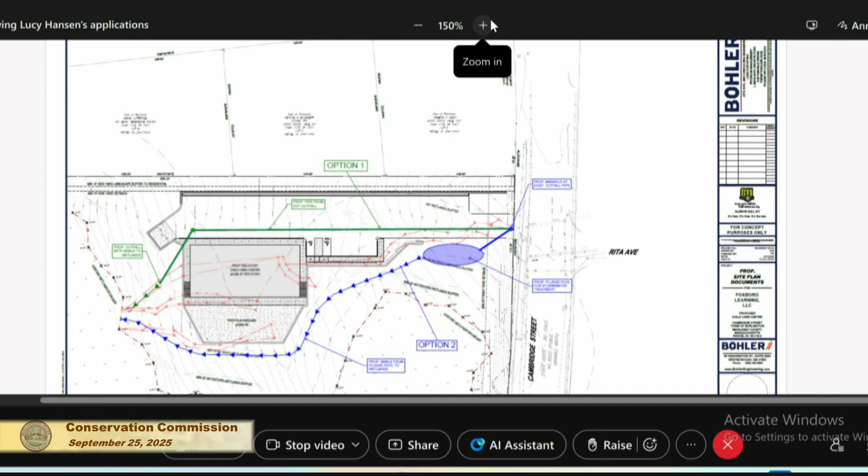Foxboro Learning is looking at developing a new learning center at Zero Cambridge. In the process of originally surveying and developing this property, it was discovered that there are jurisdictional streams running down the property. This is one of the concept drawings currently being worked on, we'll get to the blues and reds in a minute. What we would like to do is have an informal discussion about how the Conservation Commission would like us to address the disturbance to the resource area, which is the jurisdictional streams.

Where the green and the blue intersect right off of Cambridge Street is a stormwater outlet, and from that outlet it has created cut-throughs and different surface drainage and channelization of surface flow over this area, feeding the wetland complex to the west. One of the things we want to discuss with the board is we had a couple ideas on how you would like us to proceed.

One of our original ideas was that we were going to connect the outflow, the road outflow, to a different pipe, have it drain into this plunge pool, which is in blue, and then have a swale go around the property. We had two options: one, we were going to have a swale that drains.

We were going to have a swale, so this is the plunge pool. Actually, the glare from that is hard. It's actually easier over here.

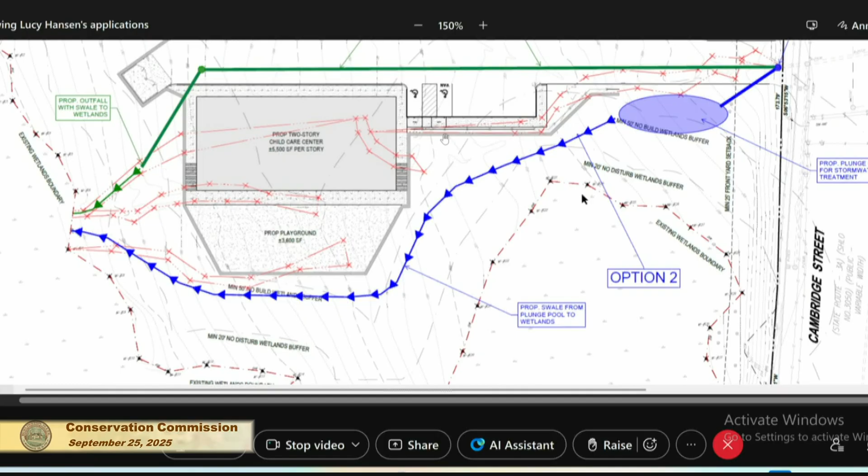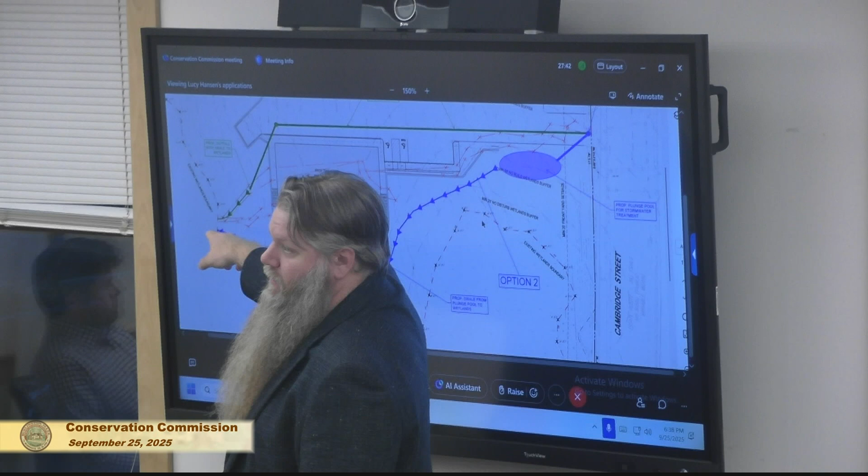This is where you can see the storm drain collects water and dumps it out here. One of our original ideas is that we create a plunge pool that collects water here, then create at least one or two swales, one draining into this wetland, the top of the wetland complex, and another swale that takes it around the property, daylighting the entire time, and drains into this wetland complex. The idea is that both wetland complexes are still receiving water that it would normally receive from the stormwater drain.

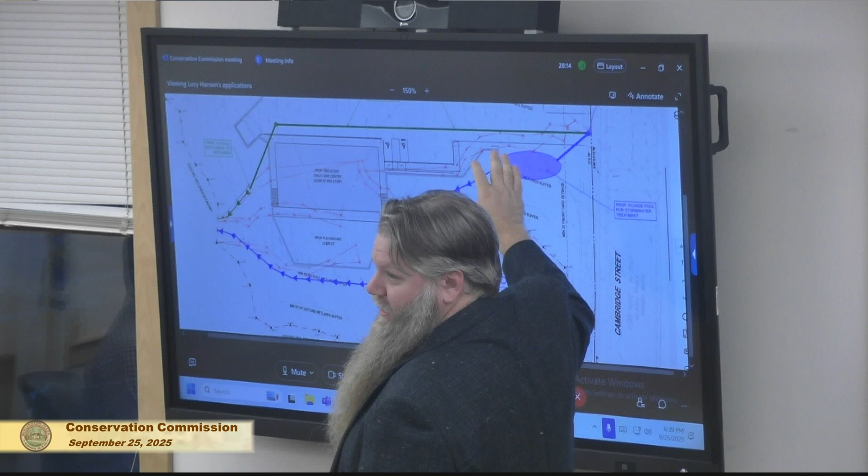We've only got one here, so we can just do the one. One of the concerns is that splitting the flow that originally all went down here, so we only have the one blue swale that collects it from the plunge pool. The idea of the plunge pool is it's going to be a settling pond, because we all know what stormwater coming off the streets is going to be like—it's not great. So the idea is to settle and collect a lot of that suspended load, and then have much cleaner water come through into the wetland.

That was option two. Option one is this green line. This entire area, green, where is it? This guy right here.

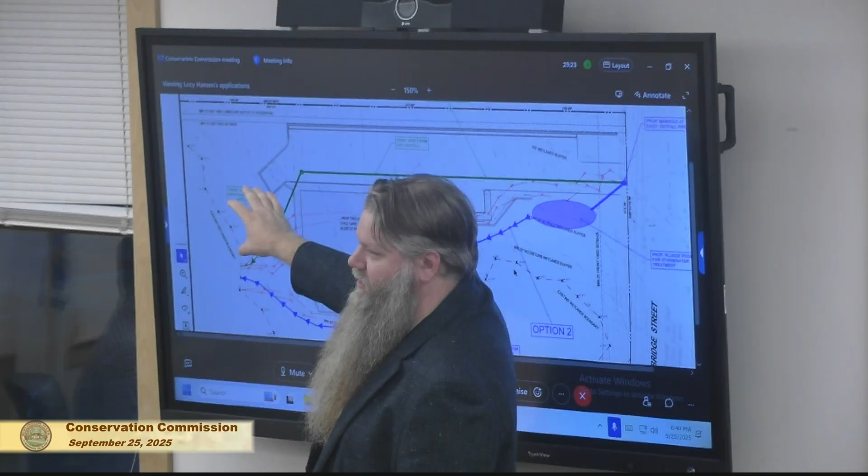Because you've all been out there when we walked in to look at the encroachment that happened during initial geotech drilling, you know that it's slanted. So there's going to be a good deal of fill that brings this up to grade to the road. One of the other propositions is that we connect it straight through with a stormwater pipe. It collects water here, sends it straight through, and we have an outfall at this retaining wall that dumps it right back into the wetlands. Really the only change is that instead of having this braided superficial flow that channelizes over time, it takes it and sends it directly to the wetland, and that way the water is still getting there.

So that's what we want to talk to you about—whether you'd prefer us to pursue this, because this is a very simple concept showing these two plans. Before we dove into it further and spent more time developing these two plans, we wanted to get an idea of which one you are more inclined for us to pursue: the plunge pool and daylight swale on the outside, or the direct link underneath that spits out at the bottom of the property.

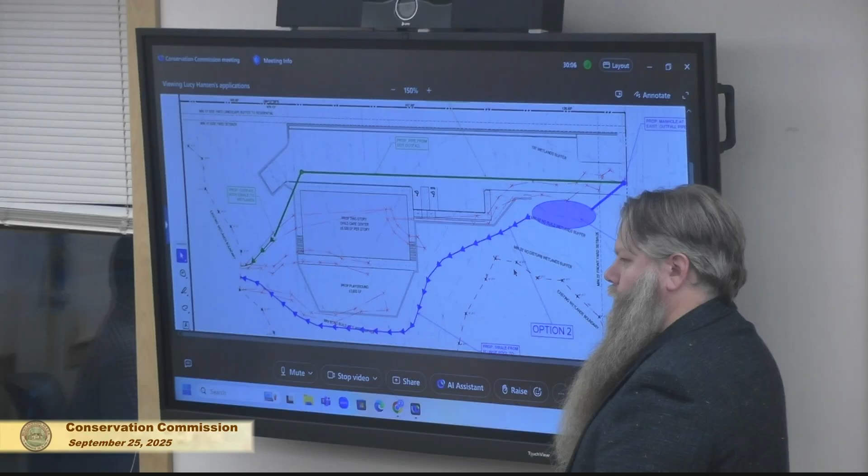Before I ask Eileen for comments, is the current stream shown in this drawing? This red line right here is where the current delineated stream banks are.

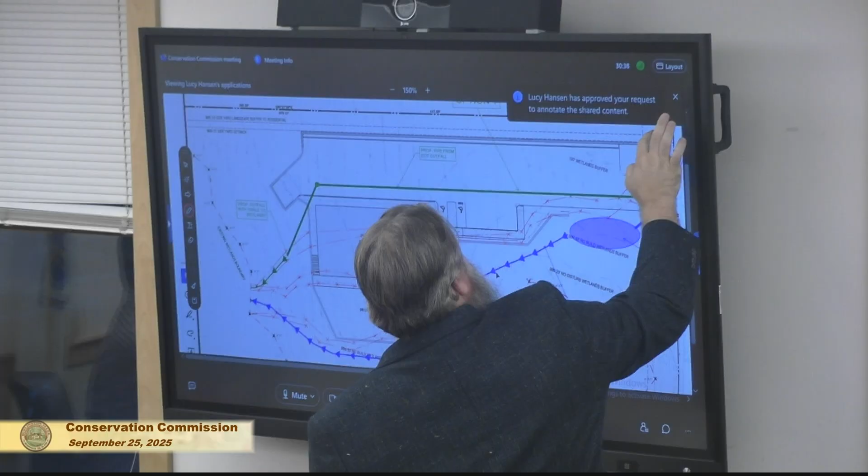Oh, does it not? Can I... this is the stream banks going right through. Wait, you can send the request. Let me see if I can grant it. Approved—so can he draw on it now? Is it approved for what? To annotate, draw. We'll see. You can scribble on it. Oh wait, I have to click it. Scribble on it now. Yeah, click it. All right, there it is. So we'll do this in blue.

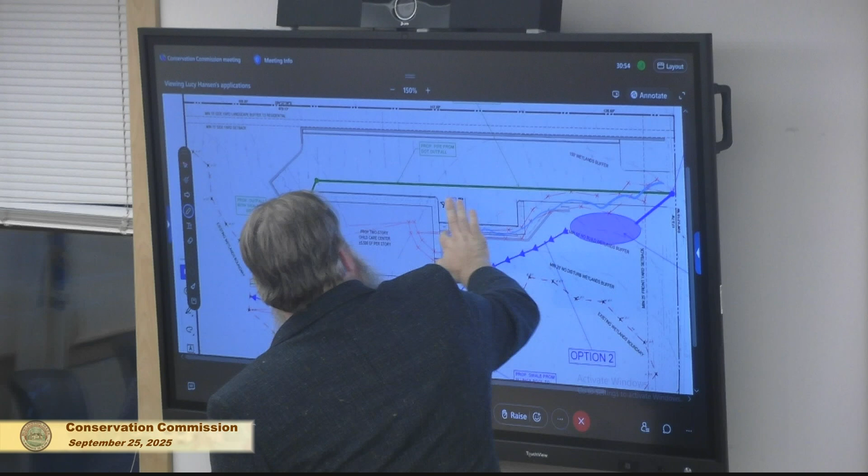I think you're the first person to ever do this. This is awesome. This is the original, and this is the delineated streams right here.

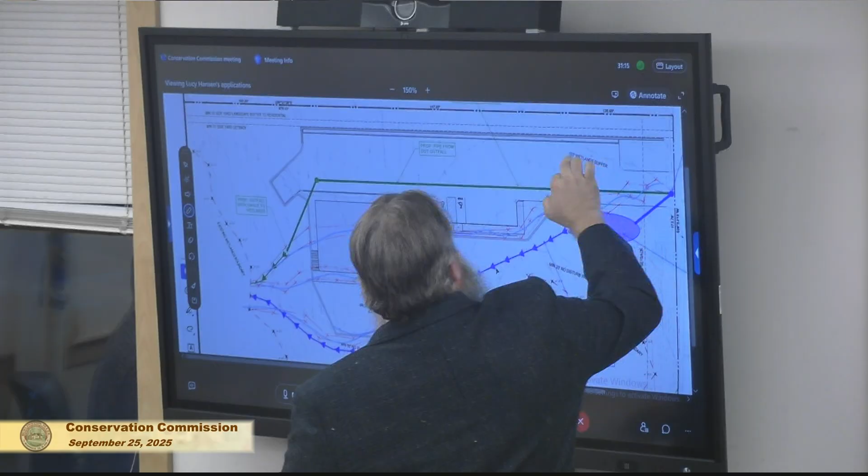So the idea is these are just braided superficial streams. They've channelized over time because it's stormwater coming off of Cambridge Street. Braided means like when you look at glaciers, because it's real shallow, superficial flow, it creates this braiding effect where the microtopography sends different rivulets of streams, and over time it has created more channelization in some of the braids.

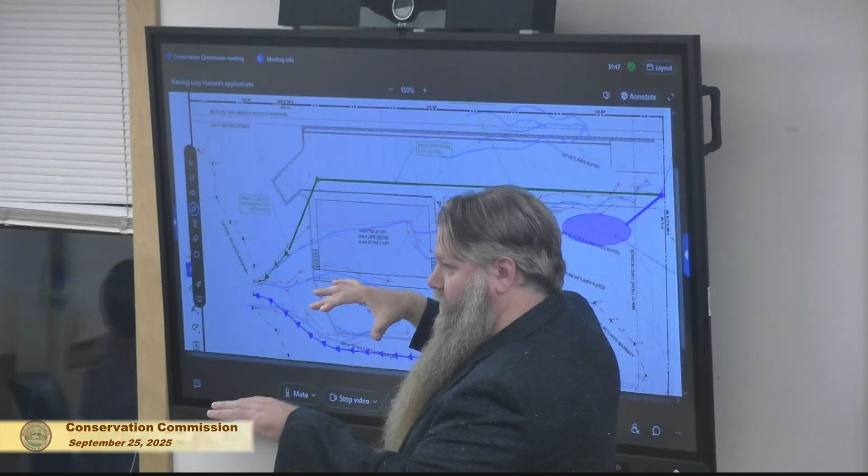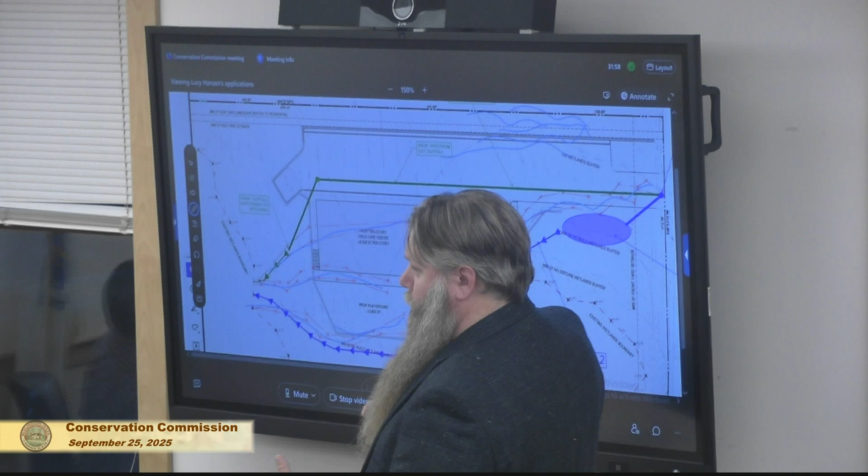That's what we delineated for the original stream bank, some of those braids that have channelized more, and that's where we get the jurisdictional streams. So one of the two options we're proposing is, since these channels were created from the storm flow coming in, we want to capture all that storm flow and make sure it passes all the way through the new structure we're developing and puts it right back in the wetland, so the wetland isn't losing any water.

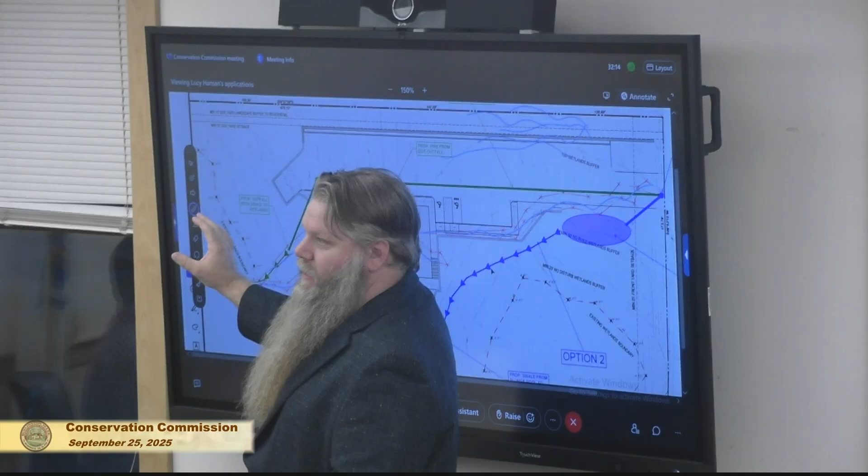Okay, so let's, you can have a seat, or stand there, whatever you want. I have a question. I was going to go to Eileen first. Eileen, do you have comments? Then I'll go to Sarah next.

Just to remind you all, they did do an ANRAD back in 2018. That's how we identified the fact that those are officially streams under our bylaw definition. But as Jeremy said, they're definitely movable, because when we found that enforcement, what turned into an enforcement this summer, there had definitely been some movement from what was there before. So that's part of why I think it's possible that they can move those streams. They are kind of a movable feast as it is.

I personally like the blue option better, because I don't like the idea of just sending it into a pipe and then straight through to the wetland. This way, you're feeding the existing wetland that's there, and you're sending some through as well. It just seems like a more natural option to me, but it is definitely just pretty dirty stormwater that's getting there in the first place.

One of the reasons why we wanted to give this option as well is because with this option, we are building this swale in the 50-foot no build. So Nick and his team worked to redesign the building to get it out of there.

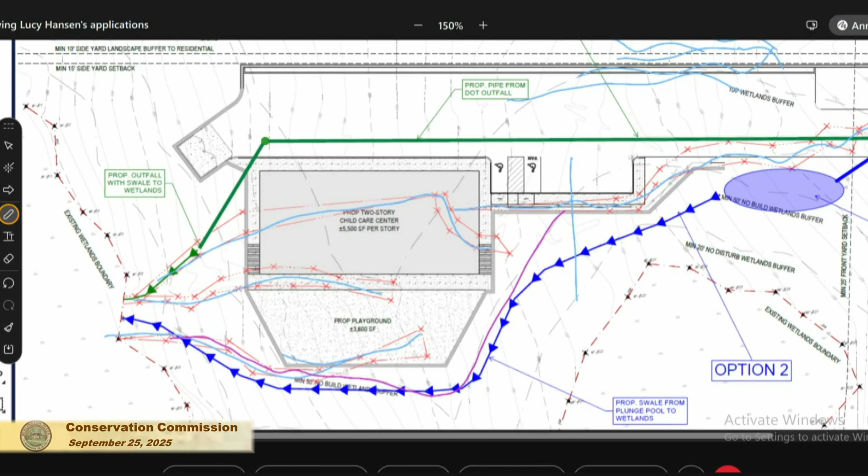The somewhat tricky part about formally sizing that plunge pool will be understanding the flows that outfall experiences today. Since it's a DOT pipe serving the DOT Cambridge Street drainage system, we'd have to understand how much area that's picking up, so we could calculate how much runoff we'd expect that pipe to experience in, say, a 25 to 100-year storm.

But we would certainly take that into consideration. Really, I think your plunge pool would then just have an overflow relief point that would discharge into that swale, and it would just carry it along back towards that wetland resource area.

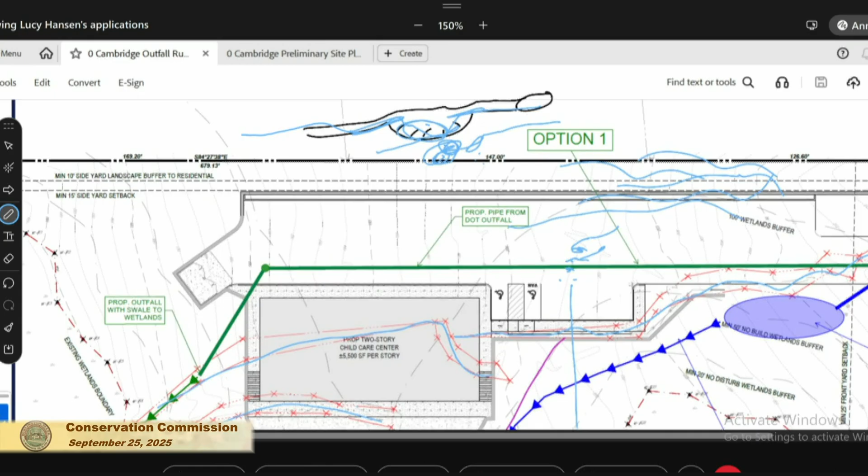It's like an equalization basin. A little bit, yeah. And the reality is too, if there's a storm event—one of these kind of crazy storm events we're seeing pretty regularly these days—

like 8 inches over the last 24 hours, or over a 100-year storm, whatever it is, it might not provide the level of treatment it's designed for from a TSS standpoint. The water would just hit the plunge pool and then go into that swale. It would essentially do what it does today, without that level of treatment, but there wouldn't be any concerns, since the water would just go down that swale.

We'll also size the swale accordingly to make sure it's wide enough and the slope isn't going to be an issue, so water will rip down that swale as it does in those streams today. This swale is essentially replicating those streams today, but they'll be more defined and grassed, so even just the grassed manner of them will provide an additional level of treatment to that water that doesn't exist in those streams today.

I think currently there's about a 40-foot difference in topography from the stream to the wetland. You wouldn't anticipate like a riprap or a check dam.

We could certainly do check dams throughout the swale, but is your concern that the swale slope would be too steep? It's a little hard to speculate on now. I think some of the swales are more sort of temporary retention, maybe to possibly slow the flow in the event of something.

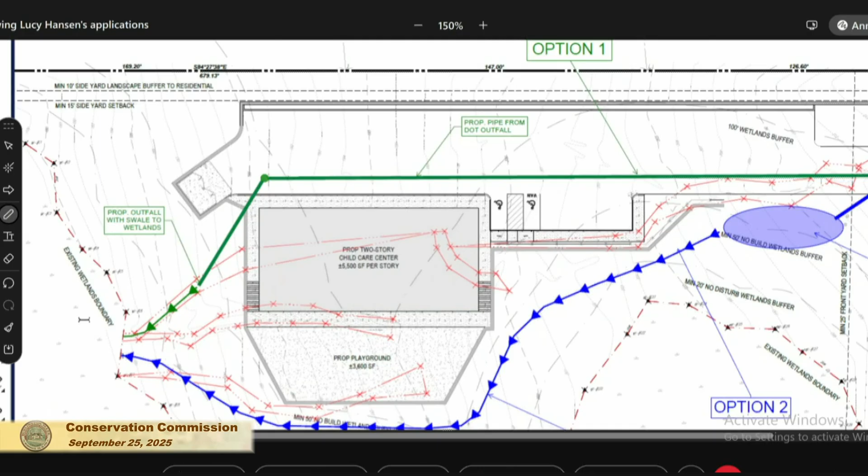If anything you're doing is changing the nature of that overland flow to the wetland on the right, you may want to direct some water to go into that wetland to compensate for that change. I don't know how you're changing contours and filling and all that.

Absolutely, as we get into the design we'll do kind of a watershed analysis and see what's going where, which part of the wetlands is being fed by what, and then match those areas to the maximum extent we can.

And the last thing I have is if any of the wetlands, like that one on the right, seems unhealthy because it's not getting sufficient water, you may want to make a case for delivering some of the water into it to help it along. I don't know if that's the case, but that wouldn't be naturally occurring. But if you think all your development is going to change the natural flow into it, you may want to do that, especially if it's not looking so good.

Yeah, Jeremy, correct me if you think differently. I don't think it's going to be too big of a lift to come up with a design that matches the existing condition today, in the sense that we're sending similar flows to these different areas of the wetland. I don't think that's going to be too challenging, but we'll have to really explore that in more detail once we put our pencils to it.

Well, we're kind of out of time now. Is there anyone who wants to make a last comment? Option one automatically goes into your alternatives analysis. Right, we did discuss it briefly. So do you have enough to go forward with? Absolutely, what we're thinking. I think this was extremely helpful. Okay, alright, thank you very much. We appreciate you coming. Good night. I keep getting bumped out here, this is the fifth time I've had to log in.

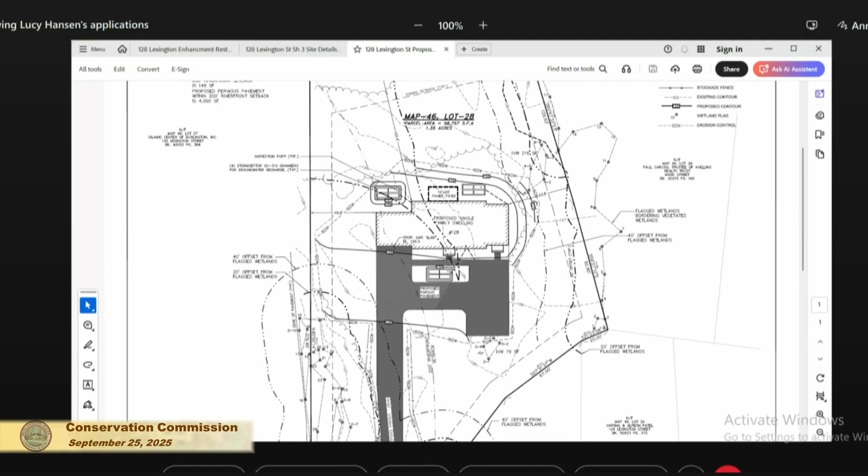But they're going to have to do a bit of grading over the chambers, so that's accounted for in the plans that came in today. They're doing a bit more, they're going to have to raise the soil above the chambers. That includes the one in front that Bill was asking about last week, so they'll probably have to make that into some kind of feature because it's now going to be about a foot over the level of the driveway. It'll be a one-mounded feature of some sort; they're just going to have to make it pretty.

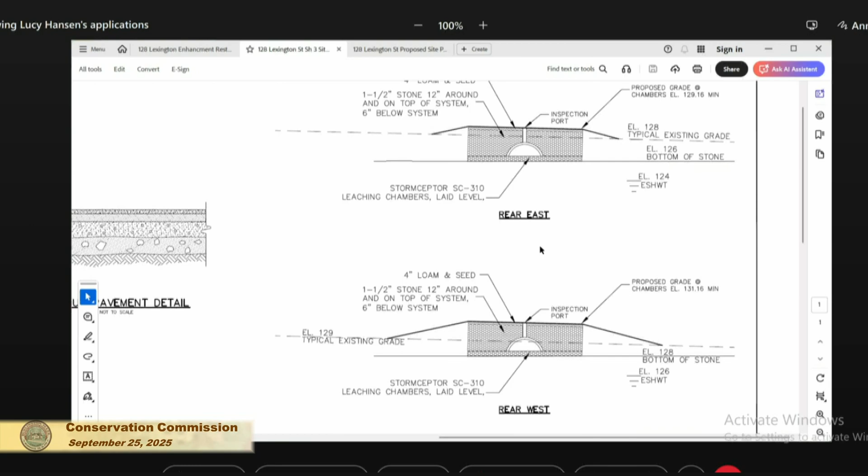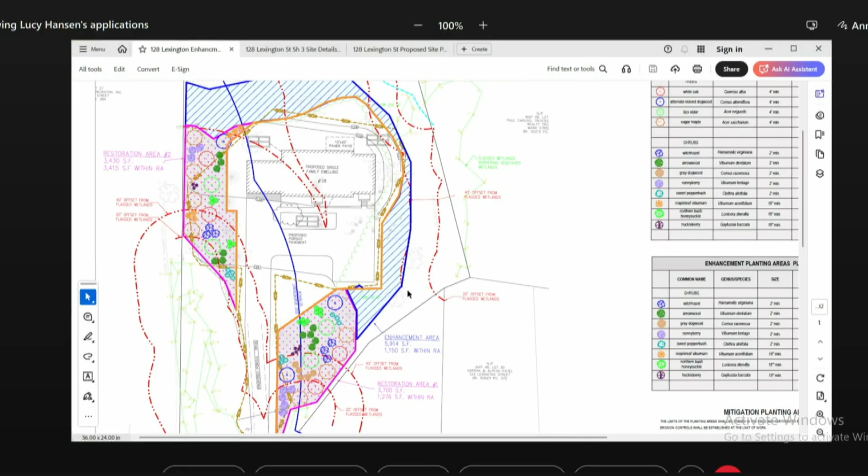They had tweaked the detail of this, provided the detail of the porous pavement, as Rich said. There's two things I'm still a little concerned about. One is there's a lot of planting happening, but still not that many trees, though they did double the amount of trees. The other thing, and honestly there's not much they can do about this, is they found the isolated wetland, an IVW with vernal pool features, practically right up against where the driveway is.

Having said that, they have to get into their site. I'm not sure what else they could possibly do about that. I just wanted to point out that those vernal pool features haven't disappeared, and the wetland is very close to the driveway. But I did add something into the conditions in the decision, which we can discuss as we go along. So how close, is it an actual vernal pool? Well, it's got vernal pool features, it exhibits vernal pool characteristics in that it appears to hold standing water. The driveway that goes into the site now, we're just building the porous pavement driveway within the footprint of that existing driveway, but we're also including a lot of vegetation within that vernal pool buffer zone.

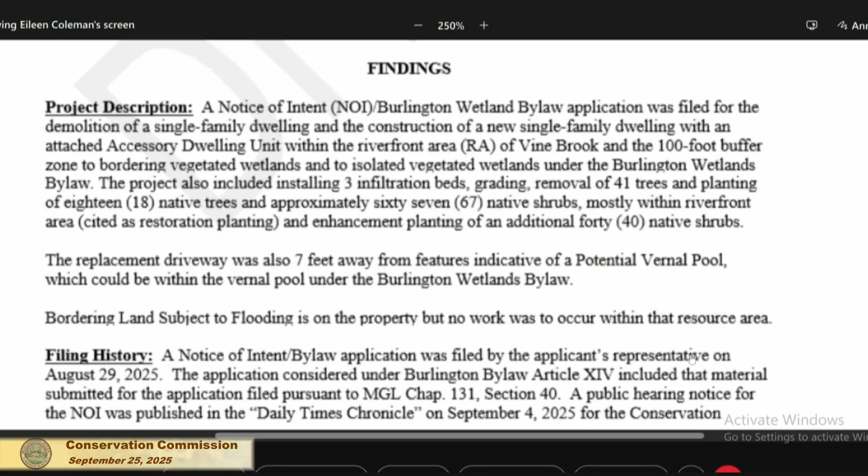Excuse me, Eileen, let me interrupt you for a second. I have 2 paper copies. Would it be easier for you to have this? Sure, why don't you use this, since I've already looked at it. I appreciate that, it'll be a little easier to review. Got glasses on too. He doesn't have his glasses. Well, I'm good, it's big enough. They're not the same document, one is the findings, the other is the conditions. Oh okay, so we're on the bylaw right now, we're on the findings right now.

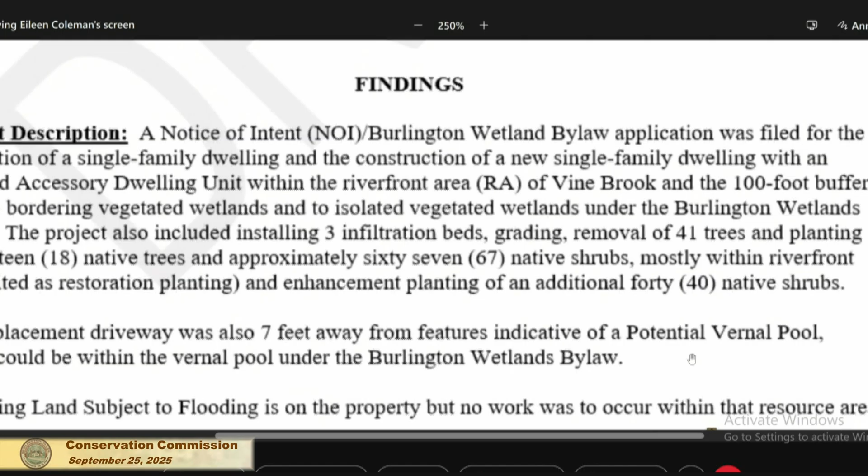Approximately 67 native shrubs, mostly within the riverfront area, cited as restoration planting, and enhancement planting of an additional 40 native shrubs. The replacement driveway was also 7 feet away from features indicative of a potential vernal pool, which could be within the vernal pool under the Burlington Wetlands bylaw.

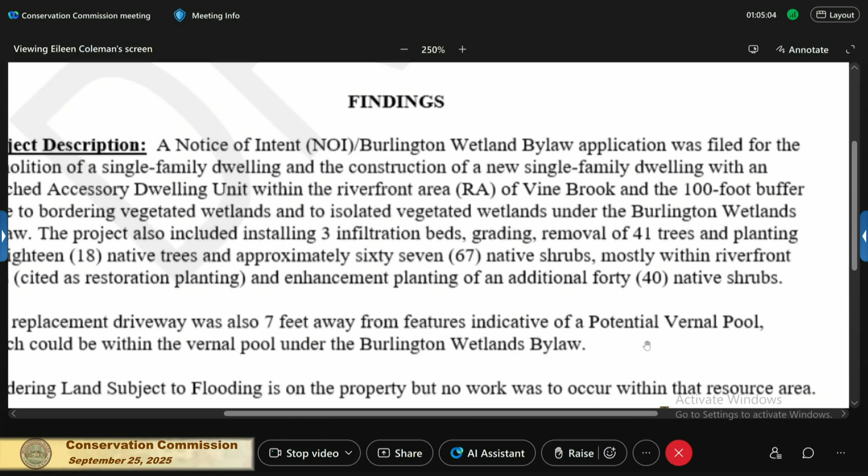Bordering land subject to flooding is on the property, but no work was to occur within that resource area. We went through the filing history with some dates and listed all the various plans and documents which were sent in, including ones sent in and updated as we went along.

As we said, the proposed work was partly within the 200-foot riverfront area, the outer 100 feet only, within the 100-foot buffer to BVW and IVW, and within a potential vernal pool, BLSF. We're repeating a lot of the same things here.

One thing that's slightly different is I think I put the wrong number in there, so I've changed it now. At their closest points, the proposed new dwelling was approximately 165 feet from the bank of Vine Brook and approximately 51 feet from BVW. I had said 46, but that was the edge of the property, so it's actually a little further, unless I got that wrong, which Rich will correct.

The closest point of the proposed porous driveway was about 20 feet from BVW, which I might have measured wrong, and 7 feet from IVW, which also coincided with potential vernal pool features. Tree removals occurred across the lot as close as approximately 130 feet from Vine Brook and within the buffer to wetlands.

An estimated 2,738 square feet of degraded area within the riverfront were created by this project. This represents less than 5% of the total lot size of almost 59,000 square feet. Within the RA, the applicant proposed almost 4,700 square feet of restoration, lawn to naturally vegetated land, and over 1,100 square feet of enhancement, adding native woody vegetation.

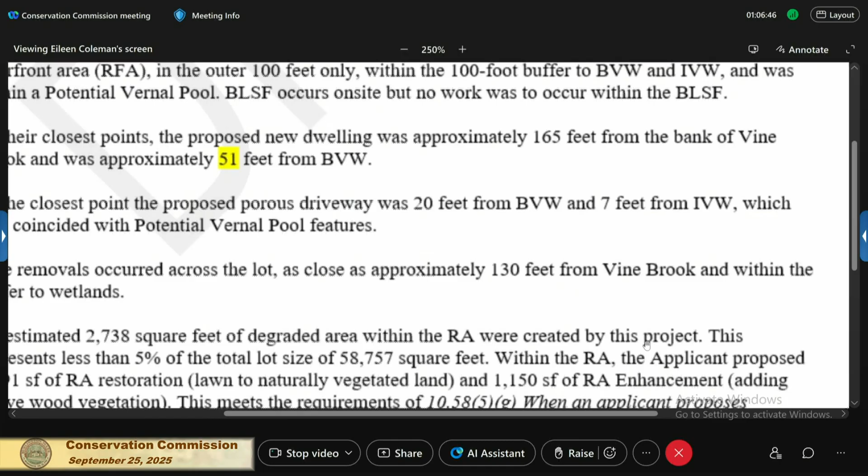This meets the requirement of 10.58(5)(g). I won't read that whole thing unless you want me to, but it's about providing at least 2-to-1 of mitigation area to area of alteration, not conforming to the criteria, etc.

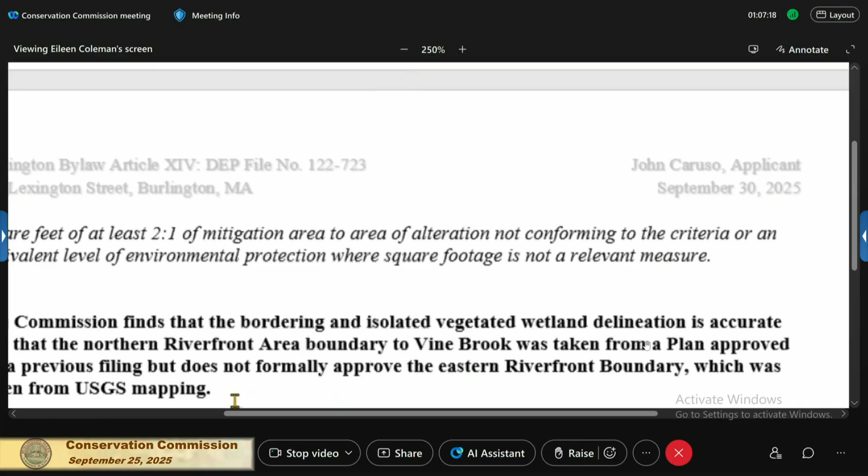The Commission is finding that the bordering vegetated and isolated vegetated wetland delineations are accurate. The northern riverfront area boundary to Vine Brook was taken from a plan approved from a previous filing, but the Commission does not formally approve the eastern riverfront boundary, which was taken from USGS mapping. That's not a big deal, it was just a small feature of the lot.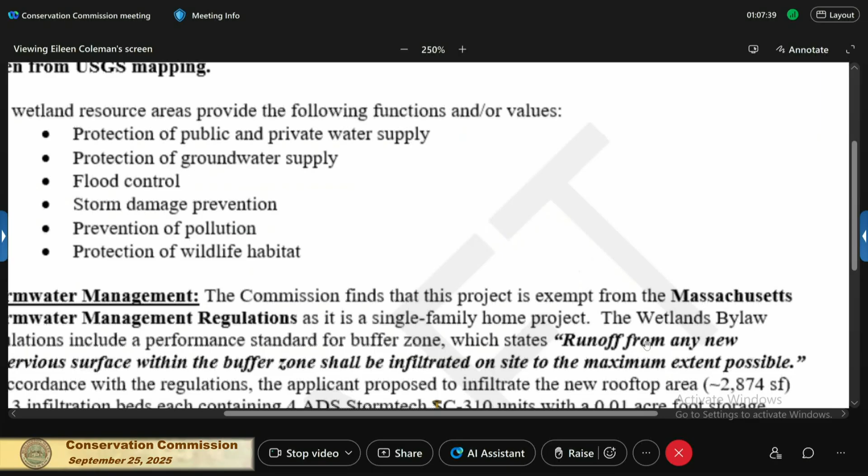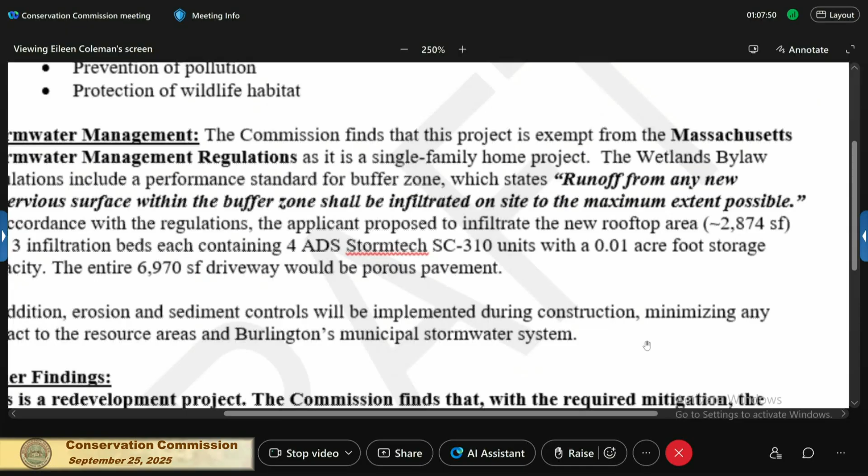The Commission is finding that this project is exempt from the standards as it is a single-family home. However, they are infiltrating to the maximum extent practicable, consistent with the bylaw. They propose to infiltrate the new rooftop area into 3 infiltration beds, each containing 4 ADS StormTech units with a 0.01 acre-foot storage capacity, and the entire driveway would be porous pavement. Erosion controls would also be implemented during construction.

Other findings: this is a redevelopment project meeting performance standards found in 310 CMR 10.58(5)(d) and (g), and additionally the Commission finds that given the site constraints, there is no feasible alternative. The highlighted ones are the ones we're going to have to vote on, or just things to be aware of. The Commission is going to vote to waive the 20-foot no disturb setback.

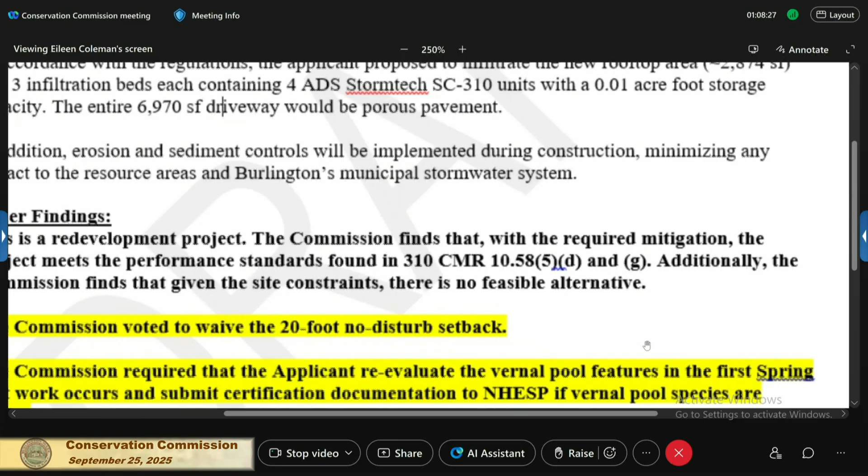The Commission is also requiring that the applicant reevaluate the vernal pool features in the first spring that work occurs, and submit a certification document to NHESP if vernal pool species are found, to take a look at that, if they're okay with that.

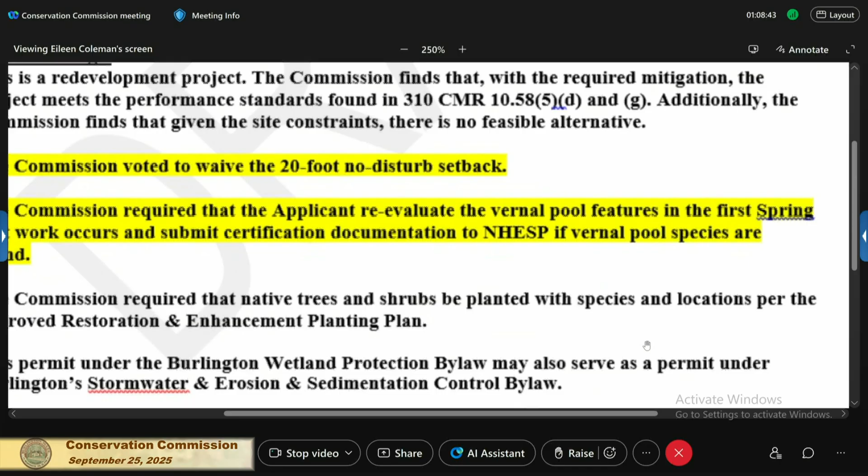The Commission is requiring that native trees and shrubs be replanted with species and locations per the approved restoration and enhancement planting plan. The permit will also serve as a permit under the Burlington Stormwater Erosion and Sedimentation Control Bylaw.

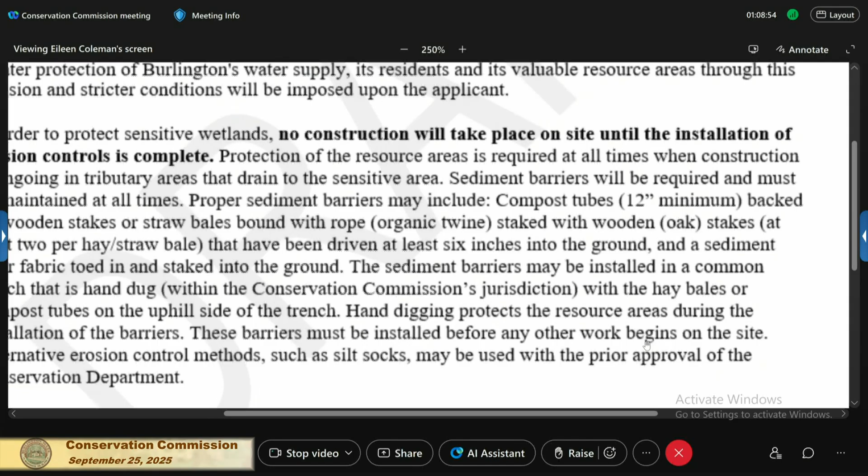All standard stuff for the next half a page. They're going to use either compost tubes or hay bales for erosion controls. Don't use pesticides, herbicides, or fertilizers on site. And just towards the very end, we're suggesting a bond in the amount of $3,500, which is pretty standard for a single-family house with fairly substantial work occurring.

Now we're just going to open up the order. So you're going to give them that, and you get it back when you're all done. Am I speaking too fast?

All right, is this small? There's a typo there in stormwater management, the driveway, the spelling. She fixed it already? Oh, she got it, DIVE. Yeah, thank you, I caught the DIVE.

Okay, again listing the same plan set, we've switched over to the order now. And then for conditions starting at 22, most of those first few are just the completely standard ones that we have every single time about how it's going to comply with the project as described in the documents that we approved.

It's permitting work in the 200-foot riverfront area and the buffer to wetlands and within potential vernal pool, bylaw jurisdiction only. No other work within other wetland resource areas has been permitted.

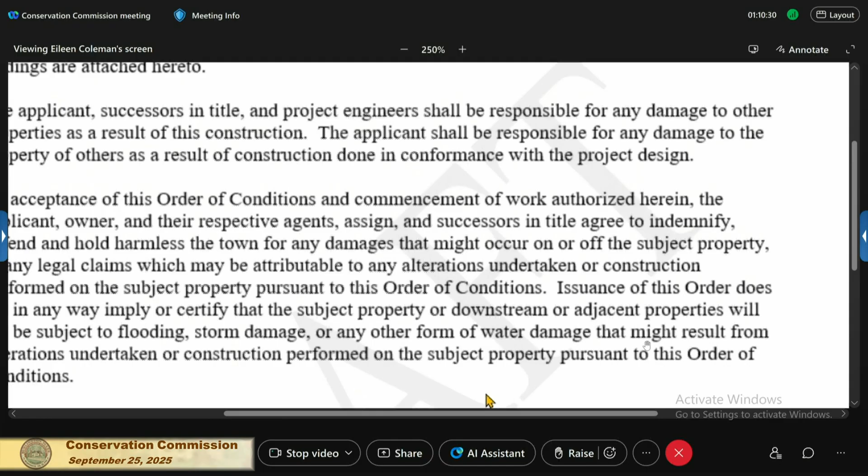Again, standard ones saying that by acceptance, you agree to indemnify and defend. This standard wording comes in all of them. Pre-construction conditions say that you have to be in touch with us a few days before the project begins.

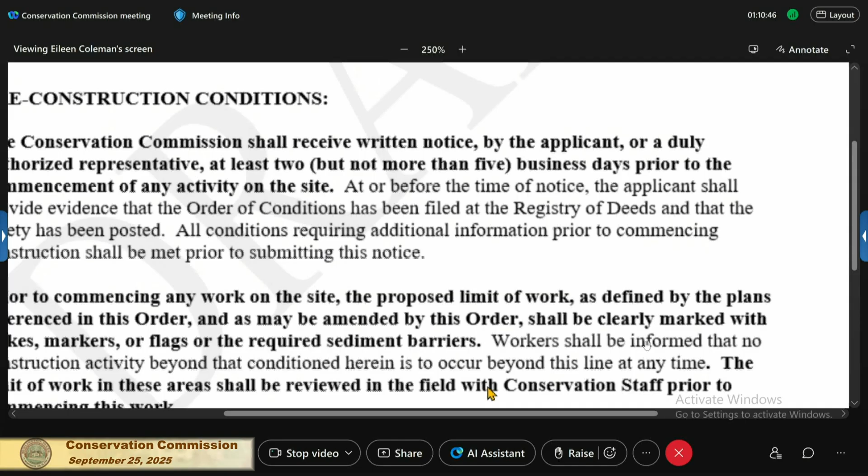Sorry, what number are you on? I'm now on 28. Oh, for some reason we're all kind of sideways on this. Yeah, Lucy, if we could just- Apologize, I swear to God. Sorry about that.

Those first earlier ones are kind of standard. So now we're getting onto ones where we have a little bit more tweaking.

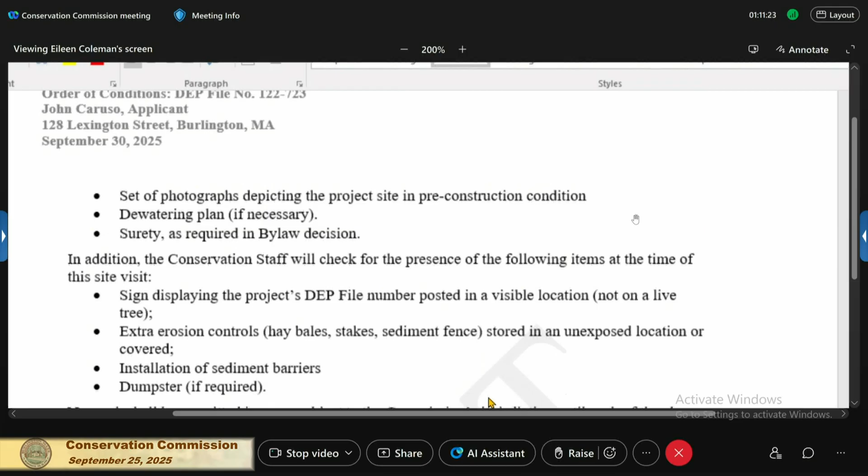All of the pre-construction ones are really talking about how you have to get your erosion controls on site, stake out limits of work, give us a call to have an inspection, at which time we're going to check all those things. You're going to give us a list of who's going to be working on the site. Your DEP sign has to be in place at that time, and your surety will need to be paid. Erosion controls all have to be in place.

Swinging down to erosion controls, the sediment barriers shown on the reference plan are 12-inch compost tubes, I believe. We are okay with that. We frequently like to have straw bales in riverfront areas, but most of the work is in more outer riverfront, so I'm okay with them using the 12-inch compost tubes as shown on their plans. I love a compost tube, if somebody can say that.

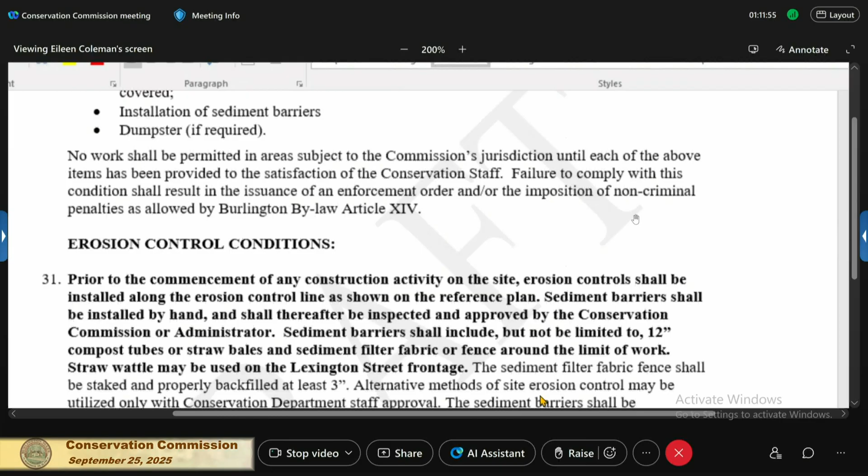Straw wattle may be used on the Lexington Street frontage. A construction entrance, which is on their plans, shall be installed at the location marked in the reference plans. Materials shall not be stockpiled on the site within 40 feet of the stream or wetlands, or at a location that will allow materials to run into the streets. There's a bit of a slope down into the site, so I don't think that's going to happen.

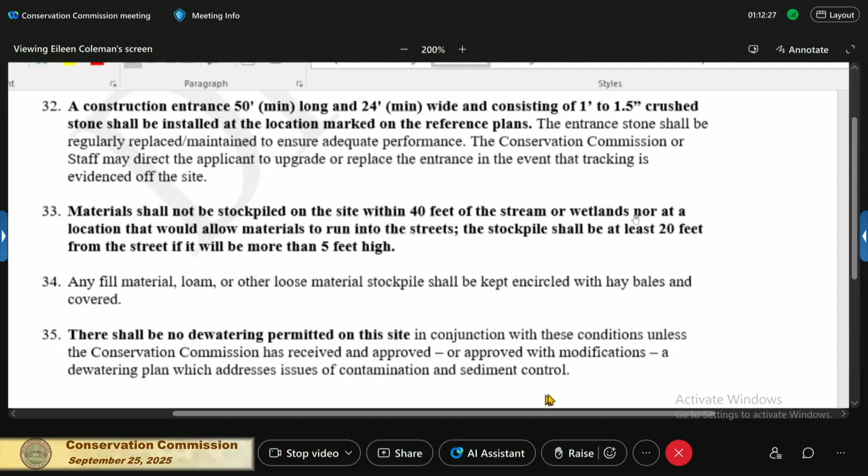Keep stockpiles on site in good order, circled with hay bales and covered if they're going to be there for a long time. No dewatering permitted on this site unless you give us a plan first so that we agree on how you're going to deal with that.

Keep the streets clean, put a silt sack in catch basins within 100 feet of the property. There is one at least right outside it between you and the Islamic Center, I believe. And we reserve the right to require additional erosion control.

For work involving filling and grading, it just says no additional grading beyond what's shown on the plan unless you come back to us first.

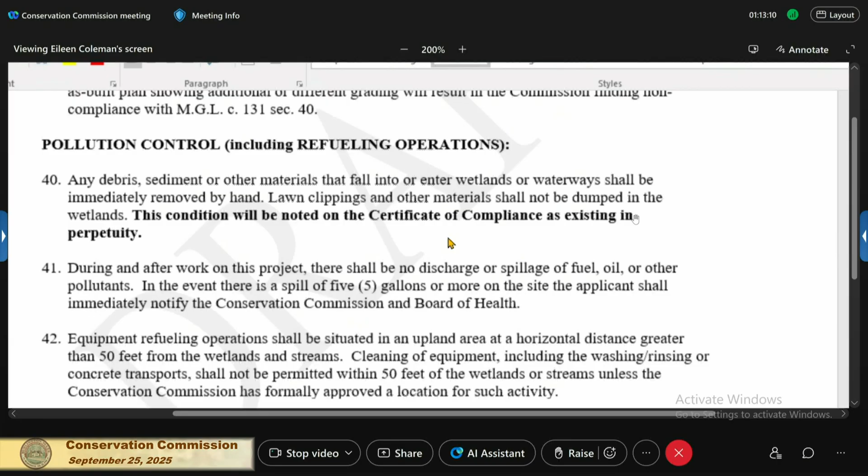Under pollution control, those are all the standard conditions about keeping the site clean, no discharge of fuel on site, and if there's any visible or smellable discharge, you need to inform the appropriate people. No pesticides, herbicides, or fungicides to be used on site within 100 feet of wetlands. Fertilizer may be used if it's slow release, phosphorus free, and approved in advance by the Commission.

Under the stormwater management plan, we're describing how it's going into 3 infiltration beds. The driveway shall be porous pavement. Applicant shall provide photographs of the stormwater management system being installed, and shall maintain the stormwater management system and porous pavement in good working order. The drainage system shall be inspected and maintained by the homeowner, and porous pavers shall not be seal coated or replaced with impervious material. This condition will be noted on the certificate of compliance as existing in perpetuity.

For riverfront area restoration, we're allowing the removal of 41 trees. Removal of any additional trees will require coming back to the commission, or at least to the administrator, to see whether further approval is needed. 18 native trees and 107 native shrubs shall be planted on site per the approved restoration and enhancement plan. They shall be monitored for 2 full growing seasons, and those that fail to survive within that time shall be replaced.

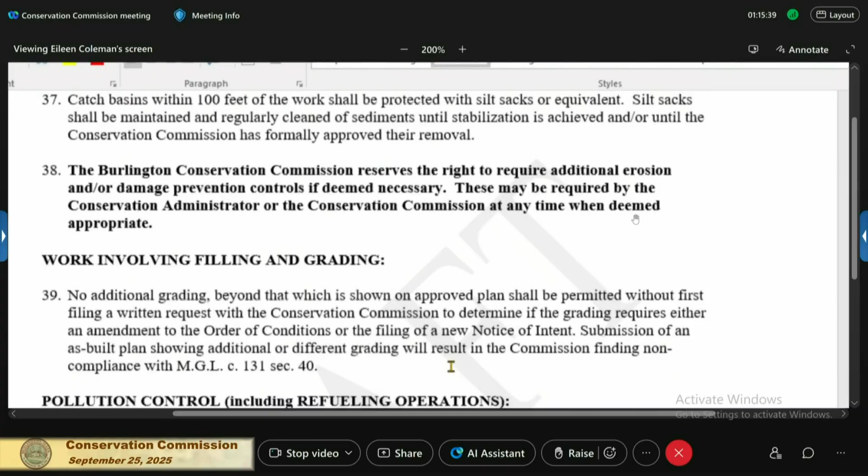Someone suggested warmer lighting, not necessarily any particular color, but not like the bright blue LEDs. There's discussion about automatic lighting with sensors so plants and wildlife aren't disturbed before people move in, and making sure the point gets across to get their attention. It's decided to put the lighting condition under the riverfront area section, with a timeline still uncertain.

So let me ask you a question about what the vernal pool is made of. It's basically a shallow depression that holds water, usually only in the spring. The lighting isn't affecting the pool itself, it's affecting the migration of wildlife out of the pool, near the driveway entrance and across the street, as the animals migrate back and forth naturally. There was also mention of a utility drop, possibly run underground by the electrician, using a wood frame to bring it closer to the house.

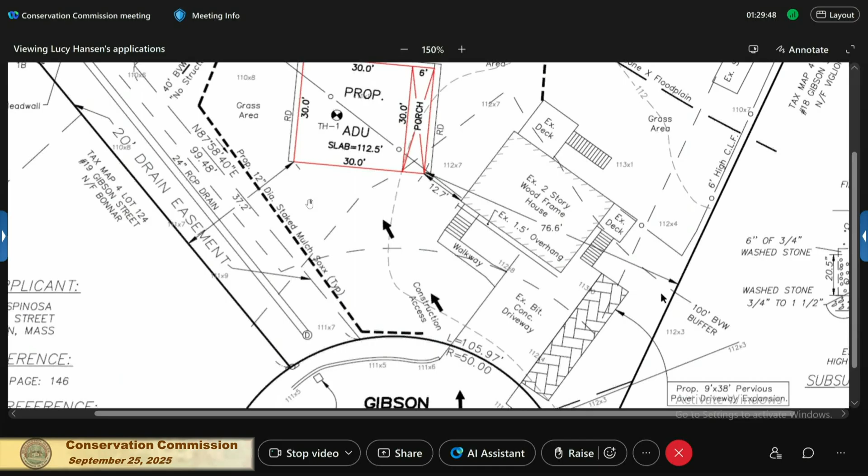I am showing construction access. They'd use the existing paved driveway to come in on, and then I have arrows showing how we get to the ADU itself. There'd be no soil stockpiling. We basically have to dig down for a frost wall for the slab, and there's no grading changes with this project.

One thing I did miss, and Jenna did mention it to me, they would like to construct a shed. There's an area on the property that shows existing landscape timbers, a kind of oval shape behind the ADU. It's still outside the 40-foot no structure zone. There used to be an above-ground pool there years ago, it's gone, that's why it's a strange oval shape. They'd like to put a shed in that location. I didn't show that on the plan.

To the left of that, within the 40-foot no structure zone, there's an existing shed. I talked to Jenna before the meeting, and they'd be willing to give up that shed if they could get a new shed in that area.

So there's a lot going on this site. You can see we're surrounded by wetlands. We think we picked the best location, but obviously that'll be up for discussion tonight. Again, I manage drainage and stormwater, and I tried to give as much detail as I could to the commission to show how this would get constructed. So at this point, I'll turn it over to the commission.

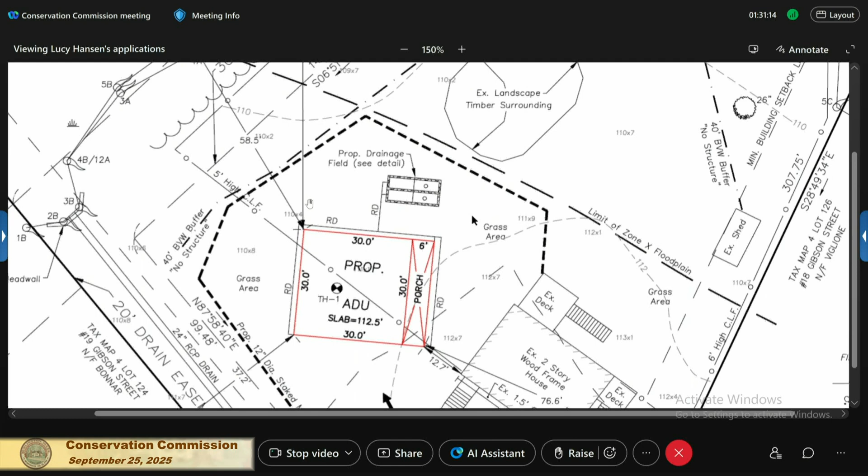I should also note that we did notice all the abutters, and we gave proof of notification back to the Conservation Department. Thank you.

All right, thank you. Eileen, why don't you go next and give us any thoughts or comments on this one? That was a very comprehensive review by Jack, I appreciate that. So it's an ADU, one of the first freestanding ones that the commission has dealt with, also some driveway, walkway, utilities and grading.

They have designed Cultec. I actually didn't look at the details of that yet, but I would 100% believe you that it's 2 feet above estimated season high groundwater. And Lucy says it looks good.

Some things came in just within the last day or so, so you may not have had time to look at them, like the alternatives analysis that they were talking about. I kind of accept that there isn't really any better spot for this on the site.

One thing to note is that when we were out there, we saw a lot of dumping of grass outside their fence and close to the stream, and they had also built up a berm of I think mostly soil and maybe grass clippings or something right on the bank, which is not a good place to put it, and that should probably be pulled off. But those are really my only thoughts or comments or concerns.

But Lucy, I kind of jumped in there. Did you have anything to add? All I had written down was grass berms, so we're on the same page. Okay, yep, all right.

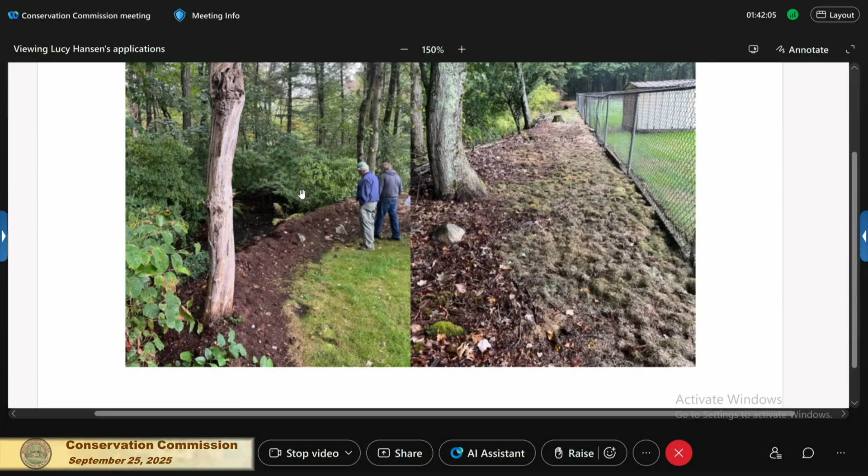Right, there you've got loose grass clippings. This, I was talking about there. Sorry, can you just go back to what you had said? Oh sorry, I'm seeing it, right, change there. Yeah, this one, all the way down, that's loose, so that is easy to just break off. But there's this here that you've created a whole berm.

We took two kids out of the swamp because they were stuck. It was like mud, quicksand. So Jenna and I took them out. That's why I did that, because they're riding their bicycles, going straight down and in.

But anyways, if you want, all this grass here can all be removed by myself. Well, that stuff's easy, because you can just rake that. I think Larry's talking about the bigger deal is the stuff that's created a berm.

Fine, switch it. Here it goes, ready, loading, there it is. If you're saying that I put grass, can you go back to that one? The one from before, this is the one that's showing the berms. I did not put grass in this area.

It's only been where my footpath was, down to the back. I didn't fill that up with grass. On that bank, no, the bank is not filled. You're right, this can be removed. I can remove it, yeah.

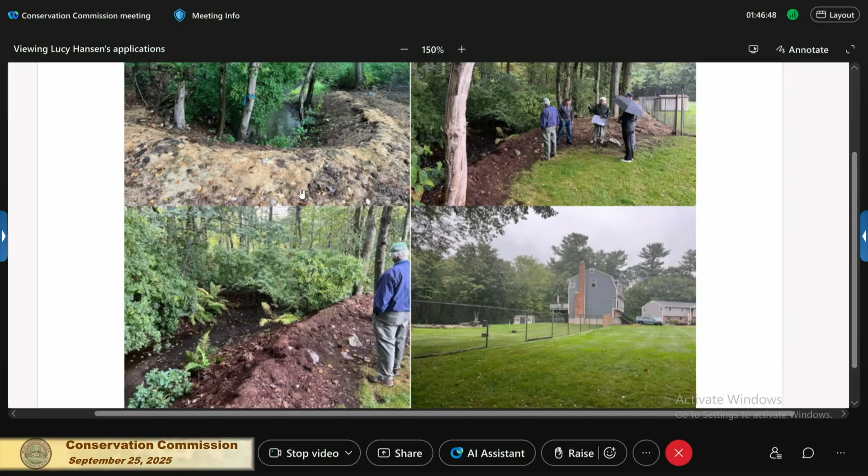And then just my next question would be, with the wetland seed mix and the native shrubs, at what distance do you want those? You obviously don't want us to put them down close to the bank. Usually, as part of a permit project like this, we have a plan that shows how many and lists the spacing on the drawing, is usually how it goes. There's usually a 20-foot no-disturb zone from the bank, and that's the area that should be restored, letting some natural vegetation eventually take over.

Okay, so that protects the bank and the resource area on both sides. The other side's fine.

You don't think that once the grass is cleared, the vegetation will come back up? Because after the winter season and spring comes in, all these weeds, or whatever you want to call them, already infest that whole line. Usually a wetlands person would comment on exactly that. Sometimes, if somebody accidentally or on purpose mows down a wetland, the question is, do you do anything to restore it? I have seen over the years, sometimes you do nothing, and in 6 months, it's back up.

If you don't mind me interrupting, I think in this case you should actually plant a few shrubs out there that are specifically wetland native shrubs, rather than just waiting to see what pops in, because you've got a lot of grass and other clippings there, and I don't know what's going to come in. So you can let stuff come in around it, okay?

Really good advice. We don't really need that. We do have a lot of wildlife. A lot of deer come in and eat everything, so they'll probably be happy to see shrubs or something.

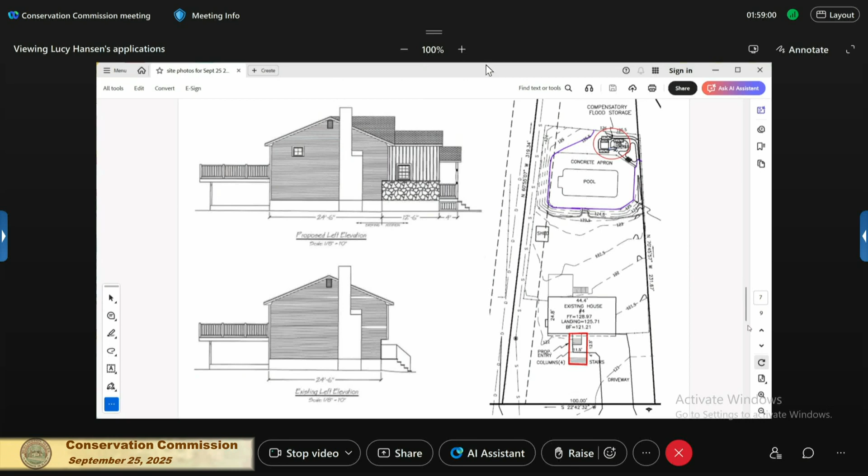Susan Cadillac with Pamco Construction, here for this project at 4 Freeport Drive. They're looking to put a small addition on the front of the house to expand the entryway about 11.5 by 12.5 feet. The floodplain is pretty much right at that front entry, so most of the filling is being done because the framing of the landing is going to be in that floodplain.

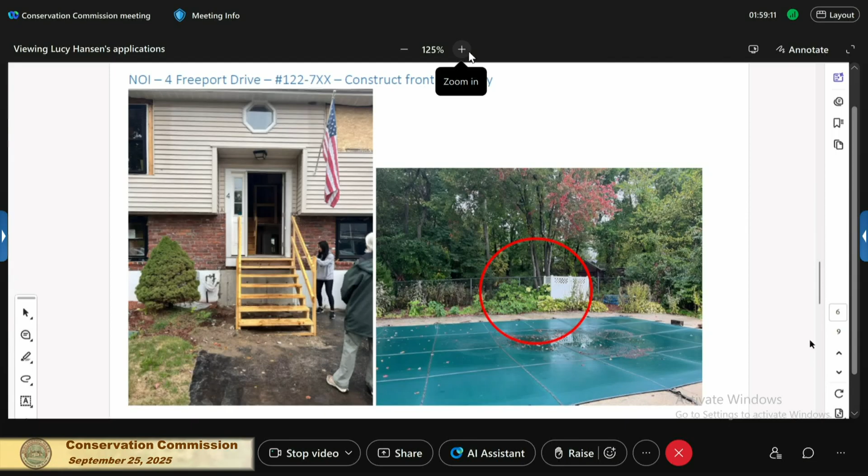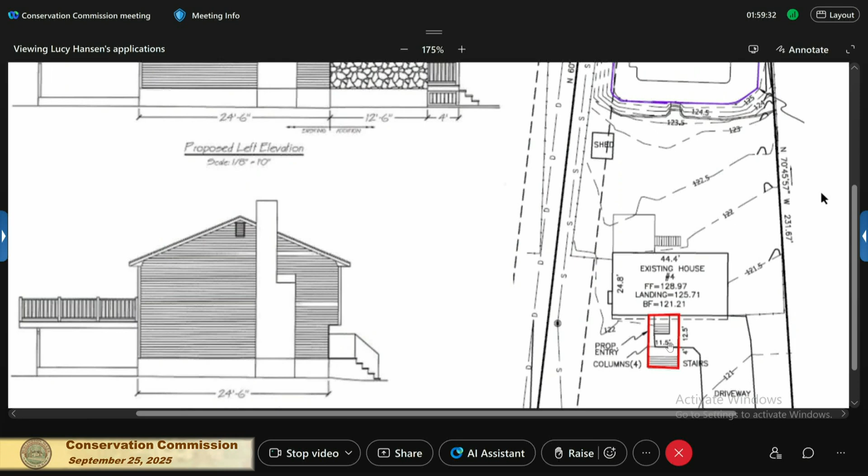Okay. Eileen or Lucy, do you have comments on this one? Sure, it's a pretty small project. Let me see if I can pull this up, the lag is crazy every time I switch it. There we go. So they're just putting in a little addition, this is maybe drawn weird because of the steps. It's actually just this little section of entryway on the front of the house. I believe it's going to be a mudroom. You can see right here the side projection.

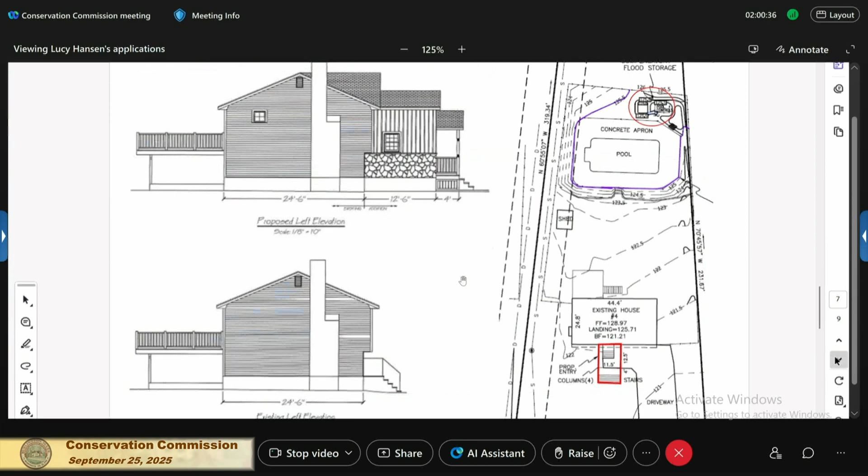They are proposing to fill, I believe, 100 cubic feet of the floodplain. The addition itself will be elevated, which is not currently shown here, but we have been assured that it is true. They are proposing some compensatory storage in the rear of the yard. We did have some questions on site about, you can't tell from these pictures, but the front entryway appears to be a couple feet lower than the compensatory storage area, but we were assured that they're matching the elevation of flood compensation. So what is actually being filled, as there is pass-through below the new addition, they don't need to accommodate that storage area, but they do need to accommodate for the upper 1 to 2 feet of that slice of the floodplain. Personally, I find the floodplain so confusing, but I've got the cut and fill table here also, which shows that they're doing the right things. Not very concerned about this project, it's very small.

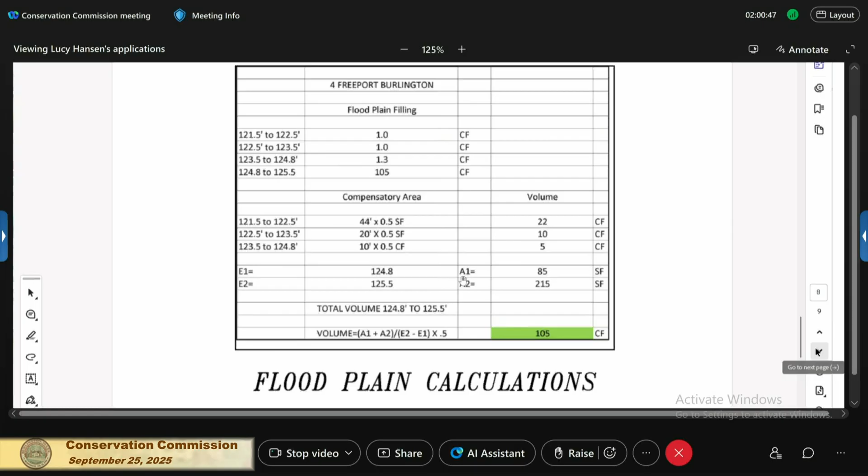Did you understand the filling part? I was there, being there makes it a lot clearer. Do you all understand what is actually filling the floodplain? Even though this thing is on posts, the platform for the mudroom, the actual base of the platform is in the floodplain from there to the ground. So they're filling that 1 foot depth above ground level, compensating for that fill and the minor fill of the posts.

It's unusual, it's not on the ground, it's actually up in the air, but it's still in the floodplain. I guess all that matters is they're filling, displacing, the floodplain.

All right, this is a fairly small project. Let's see if anybody has questions for you. Ed, anything? No. Sarah, anything on this?

I can't quite picture what this is gonna look like. I see the side projection, but it doesn't give me a very good sense. Is it gonna be like this snoot coming out from the house? That's what we're going to call it now - it's so hard not to.

A lot of split entry homes, you walk in and there's only a couple of feet before you're walking into the stairs. So this is going to give you an actual entry to walk into without falling down the stairs. And it's on legs, so you could go under it if you felt like it, almost like an elevated deck. And the water can go under it if it wants to.

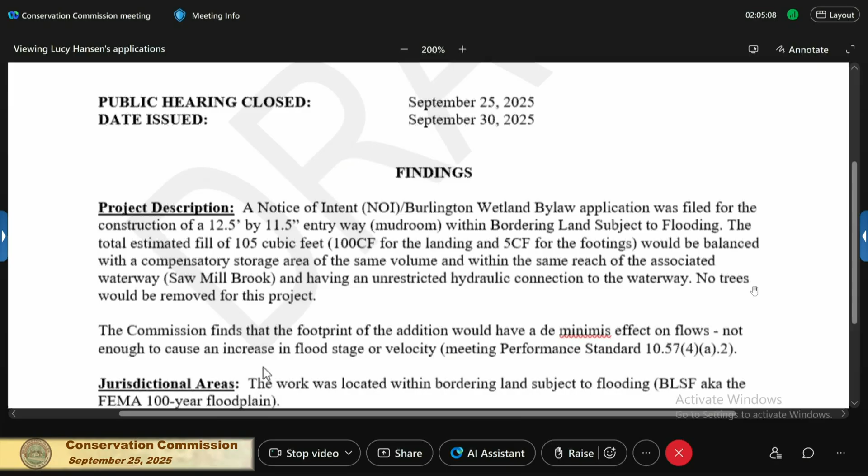We went through the history. I just highlighted that the hearing was closed on September 25th, in case we didn't close it now, so I would remember to change it if it ended up being the next time. The two documents referenced were the plot plan that we all received, and the building plans that Susan added within the last day or so - it's possible that Lucy downloaded them from the building permit, so we could all see another view.

The Commission is finding that this project is exempt from the stormwater management regs as it's an accessory project to a single-family home. Some of the adjacent driveway will be removed, providing additional pervious surface around the entryway.

In addition, erosion and sedimentation controls will be implemented during construction. The applicant is responsible for obtaining all applicable permits. I've just scooted on toward the end because the rest of that is very standard. We're also saying the use of pesticides, herbicides, and fertilizers is not acceptable in wetland riparian zones and stream areas, and we are proposing a bond in the amount of $2,000. We can talk about that for the duration of the project.

The order of conditions references the same two items, the plot plan and the building plans. The first several conditions Susan has seen several times. We're just repeating again that this project has to comply with the plans as approved. The order permits work within the floodplain of Saw Mill Brook, also known as bordering land subject to flooding. No work within any other resource areas is being permitted by this decision.

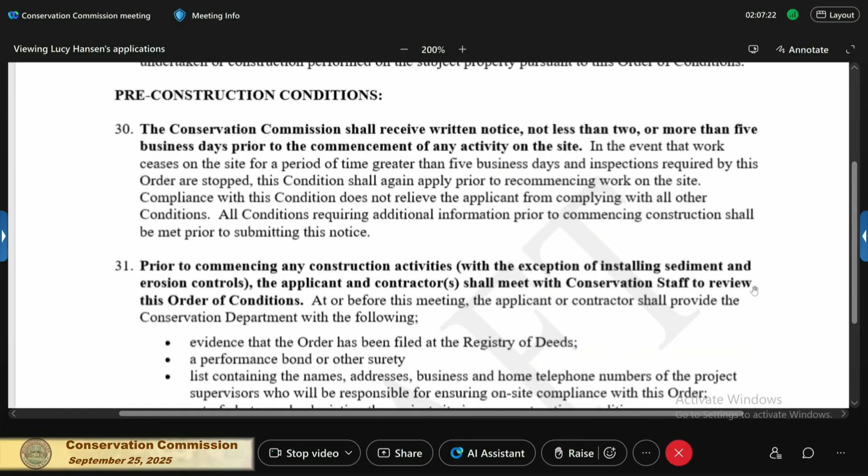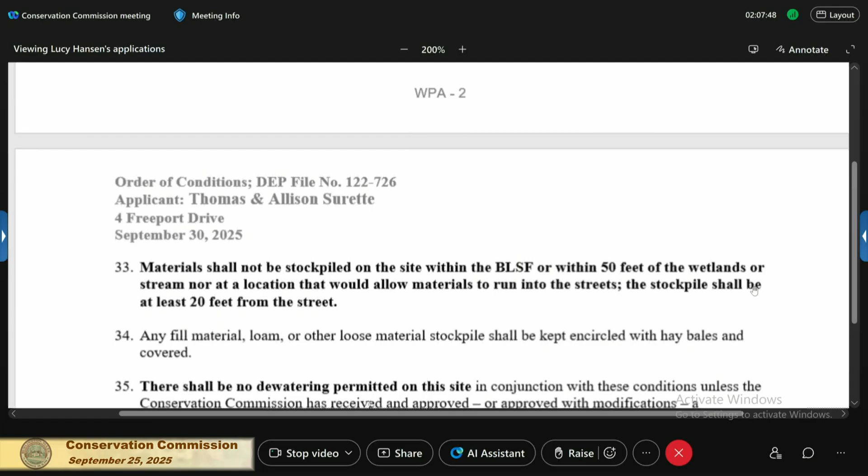We are just suggesting, if the Commission feels sediment barriers are warranted, some simple wattle right around the frontage and no more, because I don't think anything else is necessary for this small project. Those can just be 9-inch straw wattles around the limit of work. Stockpiles should not be kept on site within the BLSF or within 50 feet of wetlands. No dewatering is permitted on this site in conjunction with this project. Keep the road clean. We reserve the right to require additional erosion controls.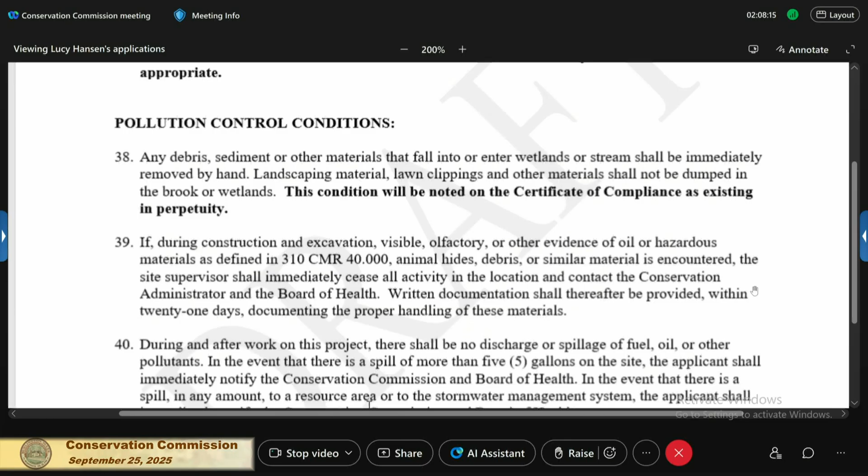The pollution control conditions are all the standard ones: if you dump anything or spill anything, let the right people know, and if anything falls into a stream or wetland, immediately take it out. That remains a continuing condition in perpetuity. The floodplain conditions are that no filling or change of grade is permitted within the floodplain other than the approved compensatory storage. This condition shall continue in perpetuity and shall be noted on the certificate of compliance. No removal of trees is permitted by this decision. And the last condition, number 46, is how you go about getting your certificate of compliance.

Okay, is there anything that causes an issue for you that you heard? Nope. I guess pretty standard stuff, I guess. All right, if there's nothing further from anyone on the conditions...

Could I have a motion to close the hearing on file 122-726? So moved. Second? Second. All in favor? 6-0-0. Could I have a motion to adopt the findings under Burlington Bylaw Article 14 for file number 122-726? So moved. Second? Second. All in favor? Same vote, 6-0-0. Could I have a motion to adopt the permit and its conditions under Burlington Bylaw Article 14 and the State Wetlands Protection Act for 122-726?

So moved. Second? All in favor? Same vote, 6-0-0. Could I have a motion to adopt the bond, requesting a bond at $2,000 performance surety under Burlington Bylaw Article 14? So moved. Okay, question for anybody who wants to answer this.